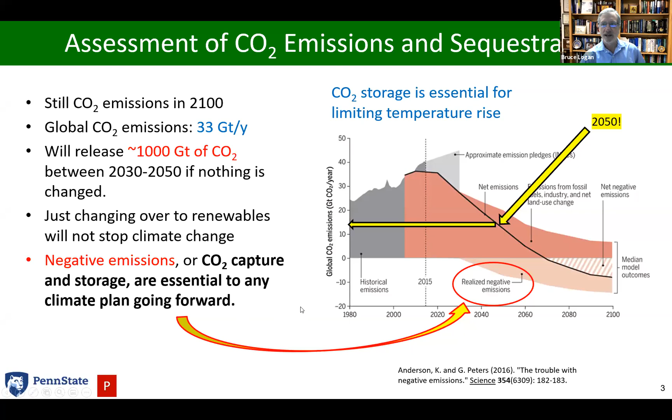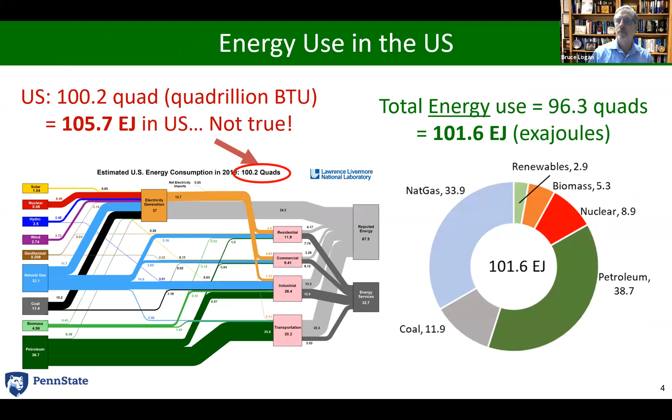Why is it none of the above? Well, if you actually look at what the US says we use, it's 100.2 quadrillion BTUs, which is 106 exajoules. But the fact is we actually only use about 96 quads, or about 100 exajoules. So why isn't the US telling the correct story?

If we zoom in on the renewable part of this primary energy, and look at the energy going into electricity, a coal power plant is about 32% efficient, primary energy into electricity. Natural gas is about 44% efficient. What the US says is that for renewable energy, we're going to use an efficiency of 37.5%, meaning primary energy is 1.04 quadrillion BTUs to produce 0.39 quads of electricity. But that's a made up number.

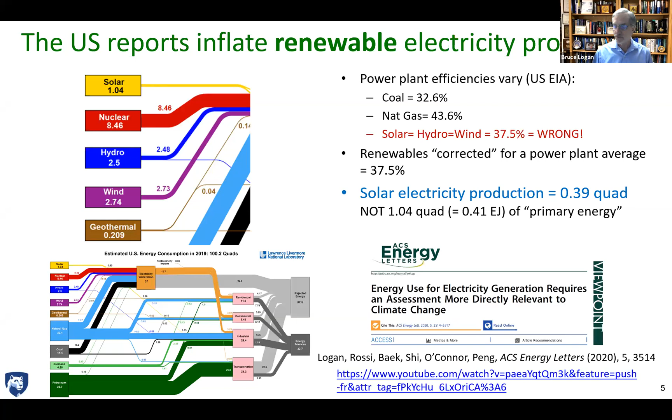Actually, solar panels are about 20% efficient. Hydroelectric plants are close to 90% efficient. These are made up numbers. So the implication is that when the US says our electricity infrastructure uses 39 exajoules of primary energy, that's wrong. We're actually using 35 exajoules of non-renewable electricity to produce our 14.2 exajoules of electricity.

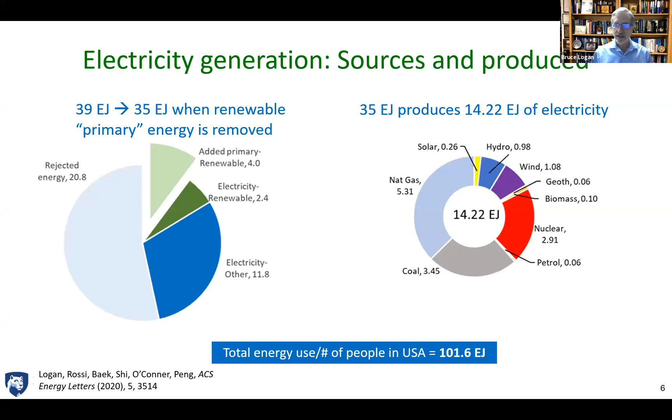Now, to put that against the backdrop, it's about 100 exajoules of total energy consumption. So exajoules, quadrillion BTUs, these are all different units, but your daily life is dominated by other sorts of units. How many miles per gallon does your car get? You probably know that.

But what about how many kilowatt hours your house uses? How many of you know about how many kilowatt hours your house uses in a day, or what the national average is for a house in the US in terms of its electricity use?

Good, we'll stop it there. It looks like we've got a consensus that it's about 60 kilowatt hours per day. Actually, the answer is 30 kilowatt hours per day.

So the problem with energy is it's all in different units. And like languages, when we want to talk to each other, we agree on a common language, or we translate it into something we know. So I either speak the same language or we have a translator. Same thing with energy units. We have to learn to take these disparate units, where calories with a capital C is different than calories with a lowercase c, and translate it into something we know, maybe kilowatt hours or BTUs.

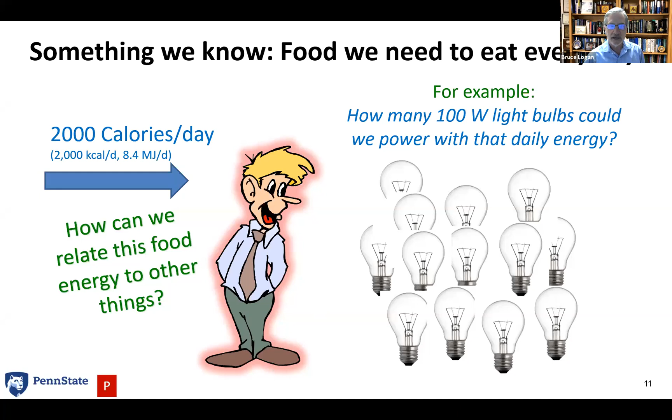Okay, that's a pretty good range. I think it's pretty typical here that most people guess about 5 to 10 light bulbs. And here we have about a third of the people said 10 100-watt light bulbs. And the answer is one light bulb. Actually, we only need 2,000 calories. You translate that into watts, and that's about 97 watts, or about 100 watts.

So that tells you that we sort of have this disconnect about how much energy we think is in the food we eat and how much energy we're using.

Now, the other side of the energy climate change nexus is when we eat those 2,000 calories, how much CO2 is being emitted into the environment from that food we ate? Just from the 2,000 calories, the beef, the hamburger, or whatever we ate, how much CO2 do you emit as a person? So in pounds per day, because you ate breakfast, lunch, and dinner, how much net CO2 do you emit into the environment?

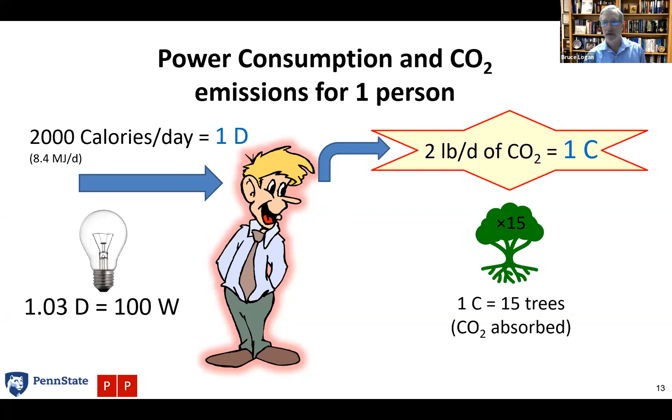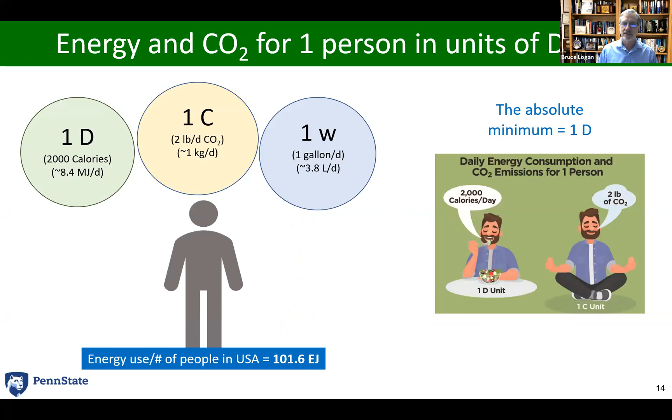So this is the perspective I'm taking: let's look at everything on the basis of how much water do I need every day? It's about 1 gallon or 4 liters. How much energy do I need? Well, 2,000 calories just to keep me going. And then 2 pounds a day of CO2 coming out.

When you look at things like the energy for your home, it's about 13 times that energy that runs you. A gallon of gasoline actually has 15 D, so a little bit more than even the energy it takes to run the average home. Food to your table, about 24 D.

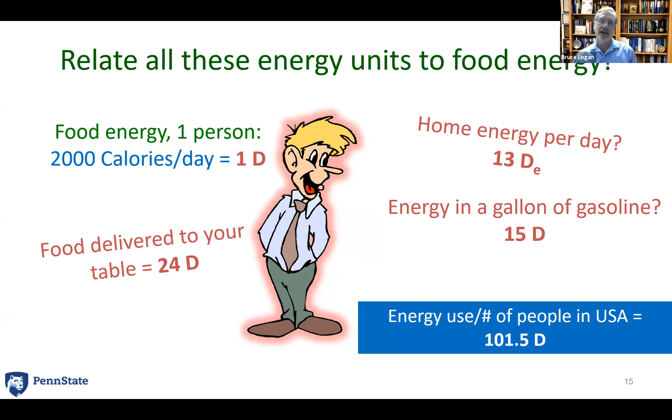Again, 100 D for the energy that everybody in the US uses. You take all the energy we use, that 100 exajoules, divide by the number of people, and you get about 101 D. There's a curious conversion here: we use about 100 quads, about 100 exajoules, rough numbers, but the exajoules for everybody in the US works out to be almost the exact same number as D.

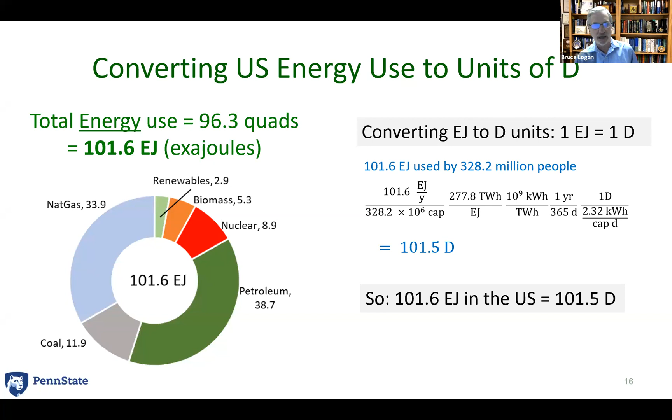So whenever you see D, if you want to think 'oh, that's exajoules for everybody in the US,' or put it into different units, that's how you do it. 1 D is also about 2.3 kilowatt hours. So whether you want to use D, or you prefer kilowatt hours or exajoules, that's what you can go for.

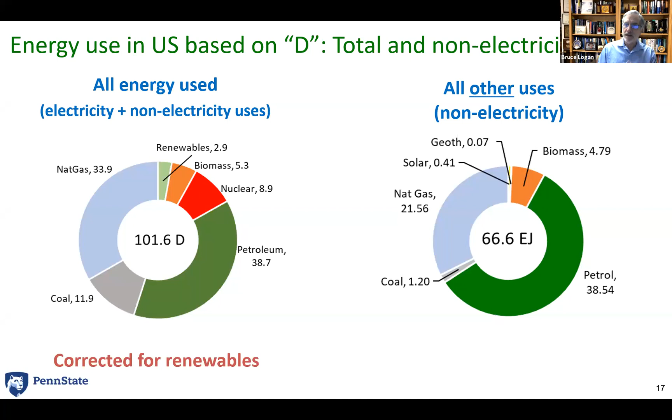We have the 100 D, or 100 exajoules, of all the energy we consume. About two-thirds of that is not related to the electricity infrastructure. It's related to other things, and most of that is petroleum products, oil and gas, and that sort of thing. But I'm not going to talk about that so much from the perspective of petrol.

I want to talk about trying to think about decarbonizing everything, going to a green electrical infrastructure. So if you look at what we have now, on the left this 35 exajoules or 35 D, and you look at the renewable energy part in terms of primary energy, where that renewable energy is just the electricity on the left, and then you convert that into electricity energy on the right, you can see that renewable part starts to get bigger, because we're just looking at electricity in both cases.

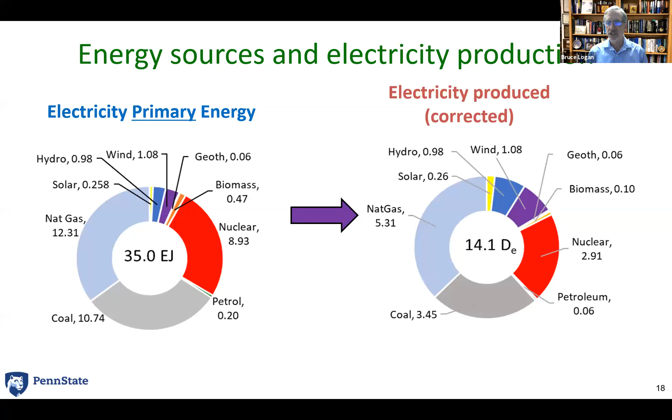In fact, as we transition from fossil fuels into electricity, we're going to use less and less, quote, primary energy, because it's going to be renewable and we're not going to be consuming that primary energy. So we can shrink and watch our energy use go down just because we're shifting to renewable energy.

So let's shift now to talking about our own lives, our house, our cars, decisions that we make in our life. For example, the electricity in your house is about 13 D, powered by the US electrical grid. That's about 5 C, just in terms of the fossil fuel footprint of that electricity. And if you have 2.51 people on average in a home, that's really about 5 D per person.

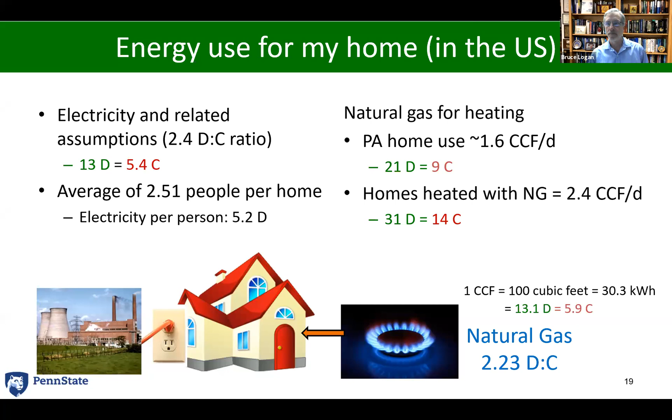Now the question is whether you include natural gas in that. A lot of houses in Pennsylvania have natural gas heating and electricity as well, and in Pennsylvania the average house uses about 20 D of natural gas to heat the home. So one of the things you think about here is, should I use natural gas to heat my home, or should I use electricity? And the answer is, it depends.

How much carbon do I emit from natural gas for heating a typical home? If you're using natural gas, it's about 8 or 9C, times 2 pounds per day of CO2. If you have a heat pump, you get down to about 5C for the most efficient heat pumps.

How can heat pumps be more efficient than natural gas if natural gas converts 95% of fuel into heat? The answer is that a heat pump moves heat, it doesn't heat up itself. It's like carrying 2,000 calories of groceries into the house - it didn't take you 2,000 calories to carry those groceries in. So the efficiencies of heat pumps are above 100% relative to how much heat they can move, or how much air conditioning they can provide, relative to the energy needed to run them.

So you can make a big decision in your life, when you have a home or need to retrofit a home or build a new home, to make sure you use a heat pump whenever possible. Now, if you have a heat pump, you don't need that natural gas.

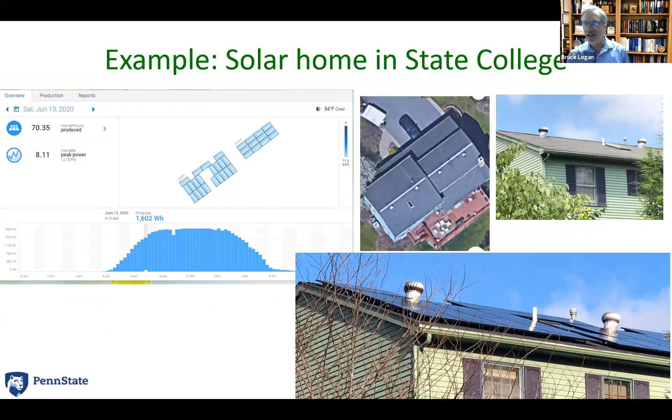This July was absolutely the hottest, sunniest month on record. So I had great solar energy production, but of course air conditioning was turned on, which kind of negated it. But the point is, they can predict it pretty well.

The other thing you have to know is how long does it take to pay back for solar energy. My contractor gave me some numbers, and I translated that into 15D. In 2020, my panels produced 17D, so I'm pretty much on target for what they say about what you should be able to do.

And if you look at different states and what electricity is selling for, and the federal discounts - you get tax credits for this - your solar panel should pay back in about 10 to 12 years, depending on where you are.

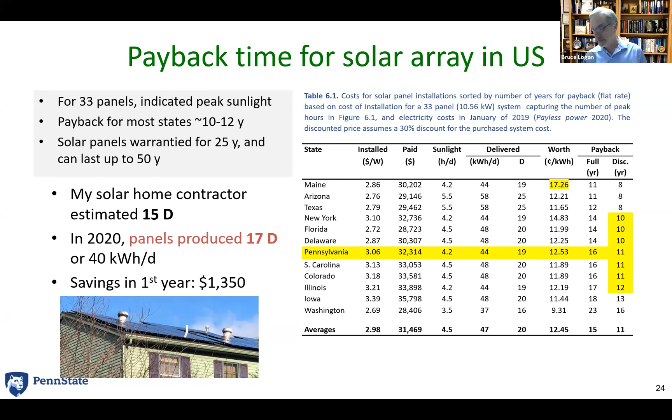Interestingly, Maine and Arizona have almost the same payback, because electricity is cheap in Arizona - it's really expensive in Maine. Maine doesn't have so much sunlight, Arizona's got a lot of sunlight. So the payback ends up being about 10 years in pretty much most places in the country. But you're probably using a lot more electricity in Arizona for cooling, so you should get them.

All right, what about cars? I got another question for you on this one.

The question is, what car emits more CO2 - a Toyota Prius hybrid that gets 52 miles per gallon, or a Tesla Model S, the energy efficient one, being powered using electricity from a coal-fired power plant?

Now you might want to think, well, this must be a trick question - of course the electric car will have less net CO2. Let's see here - about 2/3 of you said the electric car and 1/3 the Prius, and actually that's right. Let's take a look at why that is.

For those of you who may not be in the U.S., we use MPG here, of course, and it's liters per 100 kilometers elsewhere. The little quick conversion is 234 divided by MPG, or 234 divided by liters per 100 kilometer, to interconvert those units. The way we evaluate electric cars is with miles per gallon equivalent, or MPGe.

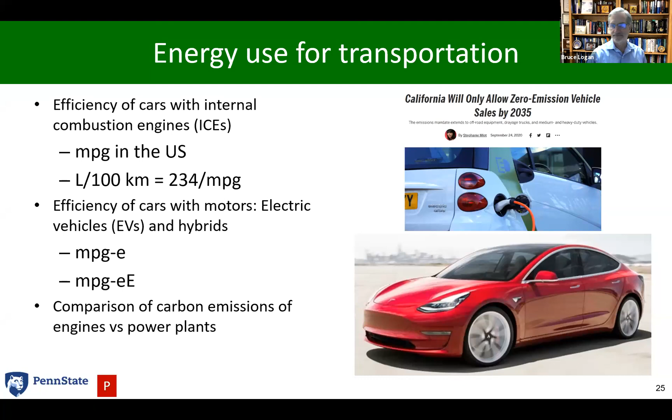That's how much energy, electricity energy, a vehicle uses that's equivalent to in a gallon of gas. So if you look at the miles per gallon of 3 cars: an average car sold here gets about 25 miles per gallon, a Prius gets about twice that, and a Tesla 3, in terms of the energy they use, even more.

Now converting the Tesla 3 back to primary energy - that's the energy that went into making the electricity that got to your house to power it. It's not a coal plant, it's the US grid on average. The Prius actually uses a little bit less primary energy to go the same 37 miles.

However, when you look at carbon emissions, because the primary energy for the Prius is gasoline, while the primary energy for the electricity is actually a range of things, some of which is carbon-free like nuclear and renewables, it actually emits less carbon. So if you run the Tesla on the US electricity grid, it has less carbon emissions.

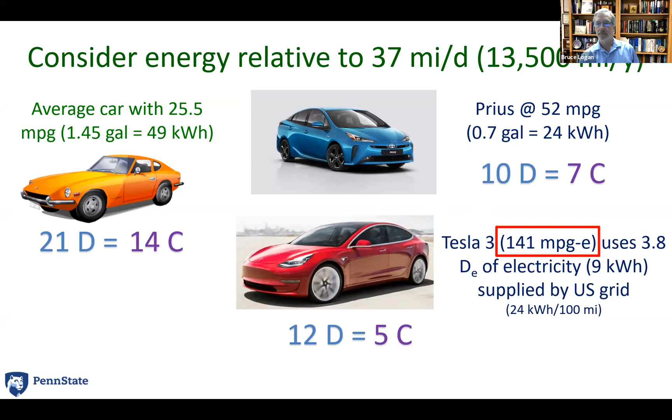I'll get back to this 141 in a second. There's that 141, but if you convert that to what I have here - this capital E is the primary energy - that Tesla is getting about 45 miles per gallon equivalent, which is why it's using more energy.

But if you look at the carbon emissions now for an average car, the Prius, and the Tesla - if you're on the US grid, it's about 5C, versus 7C for the gasoline Prius.

But because coal is produced very inefficiently - electricity efficiency is like 33% - and it has a lot more carbon emissions than gasoline, that Tesla, if it's running on a coal-fired power plant, is about 12C versus 5C on the US grid, or 7C for the Prius.

141, what is 141 miles per gallon equivalent? Again, that's the energy in 1 gallon of gasoline. I thought you might find it interesting that you, the human being, get about 300 miles per gallon of energy equivalent. That is, you could walk 300 miles on the same amount of energy in a gallon of gasoline.

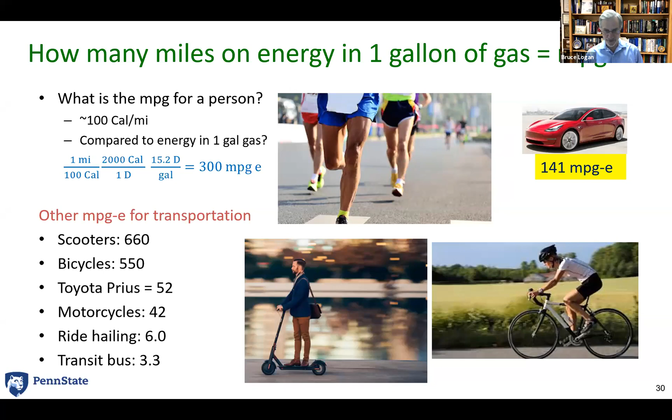If you bike, you can go about 600 miles. If you use these little electric scooters, actually, you can go almost as far on the same amount of energy. They're pretty efficient, but they're not safe at all, so don't use them - they're really, really a bad idea. And this guy, of course, I show you in the picture, doesn't have a helmet on.

Sometimes people ask me about hydrogen - I do a lot of work in hydrogen. So the question is, why not hydrogen for these vehicles? Well, the study that California is doing says that light duty vehicles, cars like you're seeing here, are not really anticipated to be fueled by hydrogen. It's a nice idea, and it's not that it's not energy efficient, but the real need for hydrogen is in heavy duty vehicles - trucks and larger vehicles.

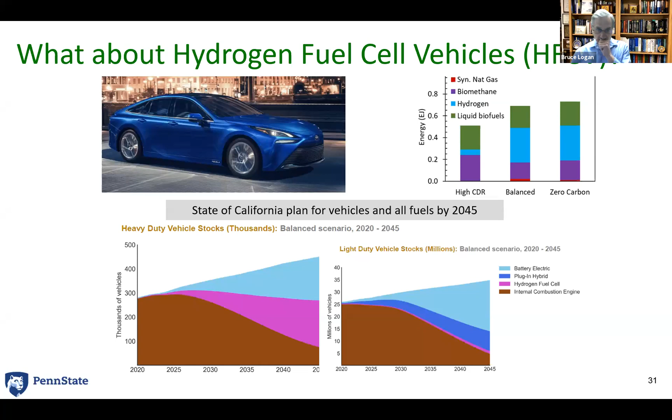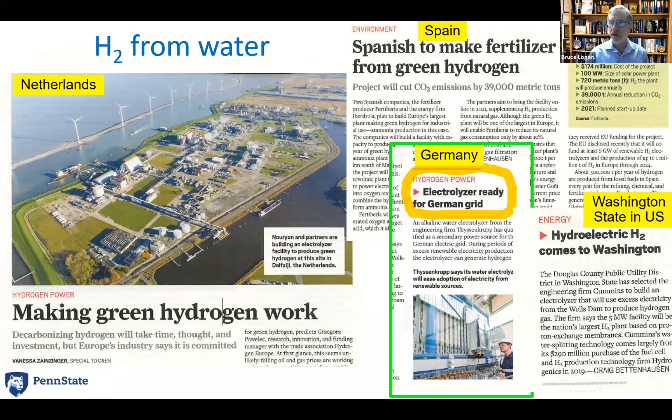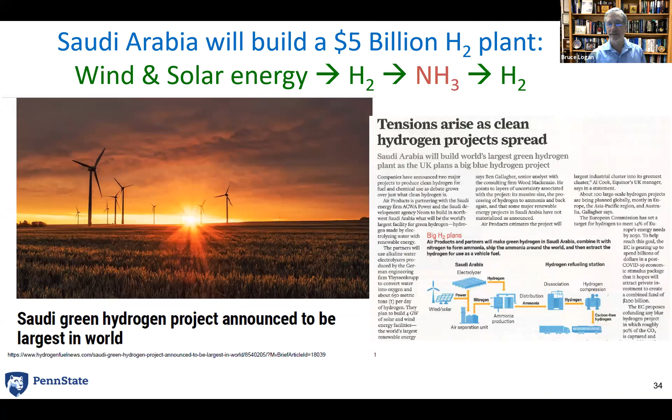And the biggest hydrogen project being planned in the world right now is a $5 billion plant under consideration for construction in Saudi Arabia. They would make hydrogen, turn that into ammonia, transport it, and then turn it back into hydrogen. Of course, maybe they'll just use the ammonia that they have.

So I've told you now what you can do with your house, I've told you what you can do with your car, and let's get back to that question of food then. How much primary energy - that's the energy in the fuels to get the fuel, the power of the harvesters, the energy in the electricity converted back to primary energy - how much energy does it take, in units of D, to put that on your table when you're going to eat 1 D of food?

This is also a bit of a quiz of how much you've been paying attention, because I told you this number earlier on, so that'll be interesting. But I'm throwing a lot of numbers around, so I don't really expect everybody to get this. By consensus, about 50% of people said 13D, but the answer was about 25D.

So the food system, you can read this, it's published widely, about 13 quadrillion BTUs, or exajoules. It's energy to produce the ammonia that goes into fertilizer. It's energy that goes into transportation and all these other things. It's about 13D, but the reason the answer is 25D is because it's primary energy.

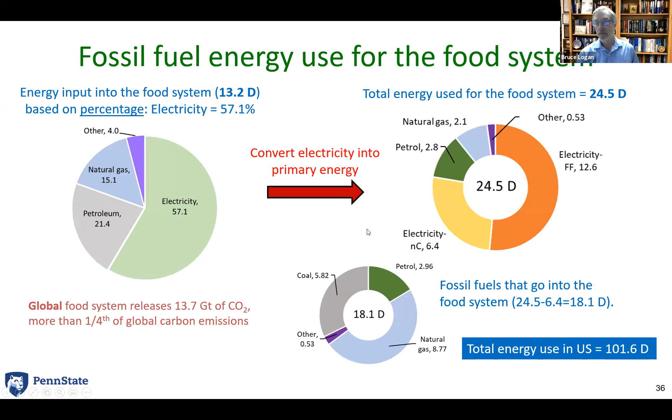So 25, a quarter of the primary energy being used in the US is for the food system, which is not something you can directly control like you can your house or your car. That results in about 11C of carbon emissions. So 1C that you breathe out due to eating the food is about 11C.

And because we're in America, we eat a lot of hamburgers. I thought I'd throw burgers up here, because a quarter pound burger is about 6C, 11C, 6C. And if you decide to go for some of these Impossible Burgers, Beyond Burgers, vegetarian burgers, that new wave of burgers, you can get that down to about half a C, which is pretty good. And also the water use drops way off as well. So I encourage you to try the Impossible Burger.

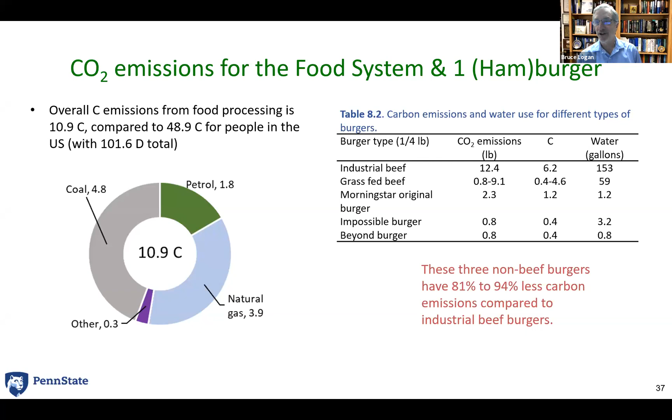They're really good. I mentioned ammonia and the amount of hydrogen that goes into making ammonia into fertilizer. About half the hydrogen made today goes into just making ammonia so that we can get modern agriculture. And that is about 1 to 2% of all global CO2 emissions just due to making hydrogen.

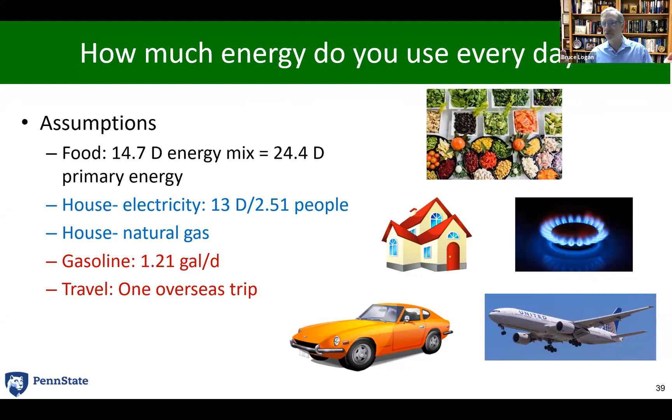So let's bring it back down to what you have control over and what you don't. I think a lot of people tuned in are thinking, okay, 100 exajoules, what can I do about that? Let's just think about these things I've mentioned: your food energy, your house, maybe some natural gas to heat the house, gasoline, and travel, one international trip or a couple domestic trips a year on an airplane. Where does that put you?

Well, that puts you at a total of about 68D, with about 57 of that D coming from fossil fuels. So these are the things that you control, right? You got to eat, okay? Everybody has to eat. Then you convert that back to primary energy.

You consume electricity for your home, natural gas, and vacation and gasoline. You can see that. Look how big that gasoline piece of the pie is. It's pretty big. That shows you how important that 1.2 gallons per day that we use on average in the US.

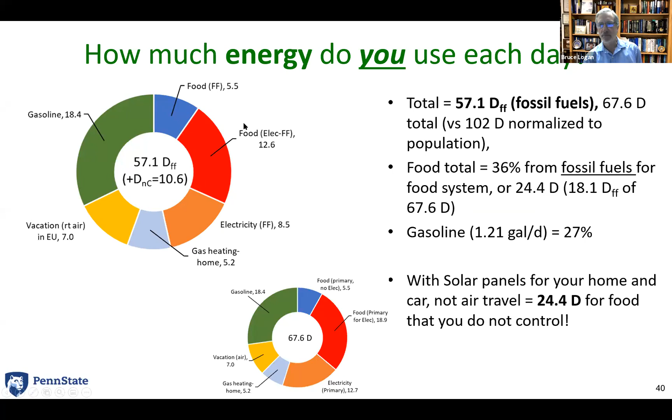And the food system here, this food from fossil fuels directly, and then the fossil fuels that we use to make the electricity, that's a big part of it too. It's about a third of that. So your activities and your food, about 30C.

Going back to trees, if you wanted to balance off that 30C of emissions, you'd need about 450 trees. And just to let you know, an acre typically has about 100 trees, maybe a couple hundred in a well-managed area. So unless you've got a lot of land, you're not going to make it, but we do have a lot of land in the US, so there is some hope there.

That 30C that I'm talking about from those activities can be compared to the 50C on average for the US. When you look at these two numbers, what I'd like you to think is, that 30C, I actually control a lot of that. I control it based on what I drive, how my house runs, and what I eat. So let's say that you took that 30C and you put solar panels on your house, and now you're fully solar, powers your car and your home and your heating and everything else.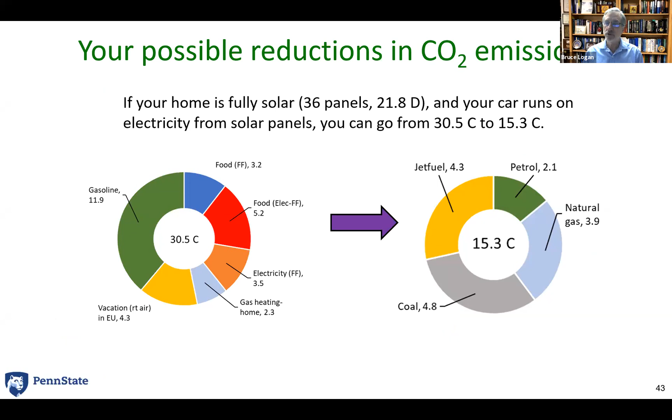Now you're down to about 15 C, because that's what's in the food infrastructure, and you can't really control that. Where do we want to get to? This is getting back to this question of global CO2 emissions. Well, we want to get to, optimally, we don't want any C to come out from fossil fuels.

There's a society called the 2000 Watt Society. I'll call them the 20D Society, who suggests maybe 15D of renewable and 5D of fossil fuels. If we're looking at 5D of fossil fuels, that's about 3C. So we're looking as a goal maybe to try and live a lifestyle that's 5D and 3C.

Wow, that is a pretty tall order because we're at 100D and 50C in the US. The scenario I went through is like 60 or 70D versus 30C. In Switzerland, where the society originated, it was about 50D. I don't know what their C was. The world averages, all the people in the world, all the energy used in the world, 25D, 12C.

Okay, so we're on a path of climate change, which is really bad just based on the world having 12C.

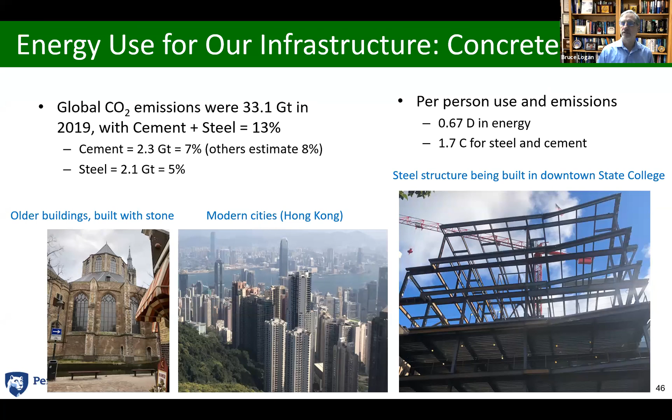Okay, I'll just say something really quickly too. We're in a civil engineering department here. The main three things that probably we need to think about are transportation, that's part of civil engineering, and our infrastructure in terms of concrete and steel. Concrete and steel are responsible for about 13% of global CO2 emissions. And so we can certainly solve our personal lives by the buildings we choose to live in, but modern cities have moved beyond stone and a little bit of cement into concrete and steel. So that's something we need to think about.

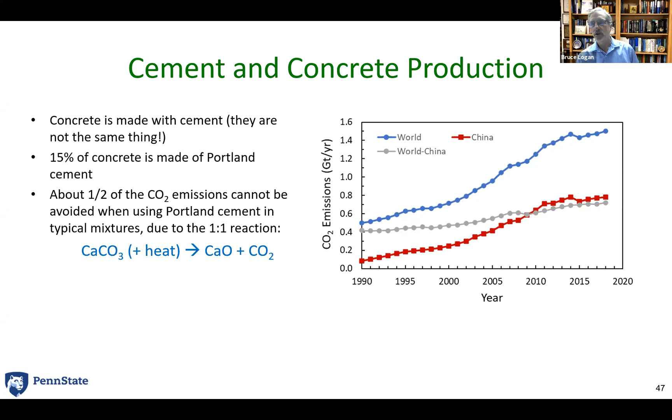But the problem we all face is that when you make cement and you take calcium carbonate, you release one CO2, and that's the stoichiometric relationship you cannot change. And so if you're going to use Portland cement, if you're going to use cement to make concrete, you're going to have these CO2 emissions. And so for the civil engineers, and I know there are people in the department that work on this, like Shad, we need to look at these alternatives - we can't impact CO2 emissions significantly unless we find alternatives for Portland cement.

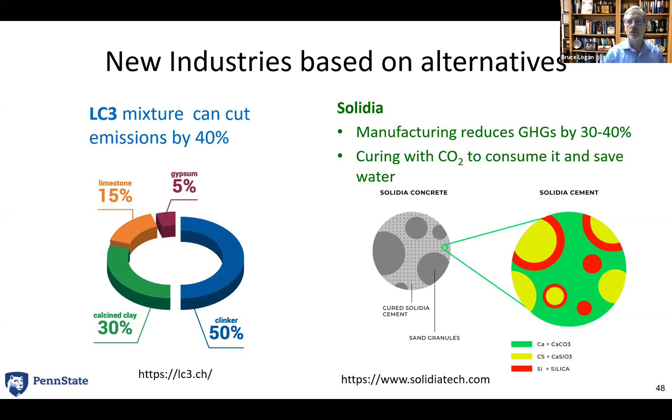That's the way we do it. And there are companies working on that. And as civil engineers, we need to embrace that and find ways to use that.

So I'll finish up now on the last topic, which I've been working on: as we go through this concept of reducing our energy, we're not going to be able to reduce it all. We need to think about climate change and carbon capture and sequestration. It can be tied in with energy, as I'll argue, but we need to recognize it has to be a part of our energy infrastructure, intertwined with it.

Trees are great. As I said, 15 trees will get you 1 C. And if you've got 20 C, you do the math. You can shade your house, and that's good for reducing air conditioning.

One of the concerns with trying to solve carbon capture through natural solutions like trees is that if there are wildfires or pests, you're going to lose that carbon right back up into the atmosphere, which has certainly been a problem in Australia and California this past year.

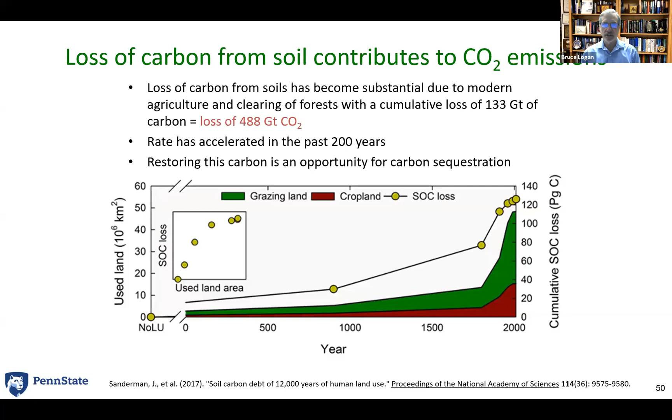Not just above ground, but also below ground, there's a lot of carbon in soils, and about 500 gigatons of CO2 equivalent has been released from soil due to agricultural practices. We're talking about 1,000 gigatons that we need to avoid and get out of the atmosphere, and 500 came because of the loss of soil carbon. So when you put a tree in, you're not just getting the carbon you see above the ground, you're also getting carbon capture into the soil.

So climate solutions where you capture carbon into trees and soils are great, but we still need energy. A recent study by Tom Richard and Erica Smithwick here at Penn State and others said, if we have this land we're currently using and we were to grow, say, miscanthus, which we could make into biofuels, we could gain a lot of carbon sequestration into the soil because these plants have an immense root system. We could use that above-ground carbon to make biofuels, and if we link it to carbon sequestration by injecting it into the ground, we get another benefit. This is a great paper showing that by thinking about dual use—getting both liquid biofuels and carbon capture—that's a win-win situation.

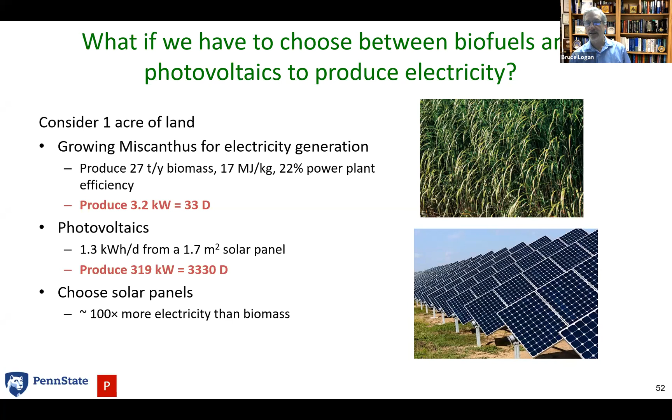Another thing you might think is, let's take that miscanthus and make electricity out of it as a source of energy. We'll grow the biofuel, convert it in a power plant into electricity, and use that. But let's compare using an acre to grow miscanthus, the best possible fuel you could have, versus putting solar panels on that acre. You'd be looking at about 33 D of energy using the biofuel as electricity, versus about 100 times that, 3,300 D, if you put solar panels on that one acre. That's why solar farms are really important. Even though we can put some solar panels on our house, we need to turn a lot of acreage into solar farms too. That's how we're going to make the electricity we need, and make it carbon neutral.

Another consideration: aren't I better off capturing this carbon into trees instead? Of course, if I do that, I can't put up solar panels. Well, an acre of trees is going to draw down about 6 C of carbon, but if you put an acre of solar panels out there, you're avoiding about 2,000 C by making that electricity the way we do on the US grid. So in terms of drawdown solutions, where we can put trees, let's put trees, but if we can put solar panels in places and generate electricity like that, it's going to avoid a lot more carbon than it's going to capture.

I think we're all going to see in the coming months with the new administration a real emphasis on carbon capture. Right now it's too expensive. This is just the capture part, 200 to 700 dollars per ton.

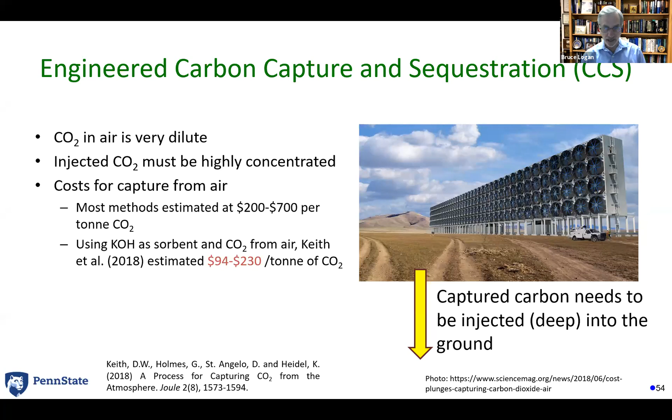There's a group led by David Keith, I think is his name, building these huge fans to move air through and capture CO2, and then you still got to inject it. The cost there is lower, getting into around $100 per ton, which is supposed to be a good range.

I mentioned one though that's an integrated solution in Belgium, in this town Mol, Belgium. They have geothermal energy, and because of that they have a lot of fans and blowers. So they think, if we could integrate carbon capture into these blowers which are already running, we could probably do this for about $70 a ton of CO2. So that's another good example of thinking about things you have to keep running for geothermal energy, a renewable source, while also dealing with carbon capture.

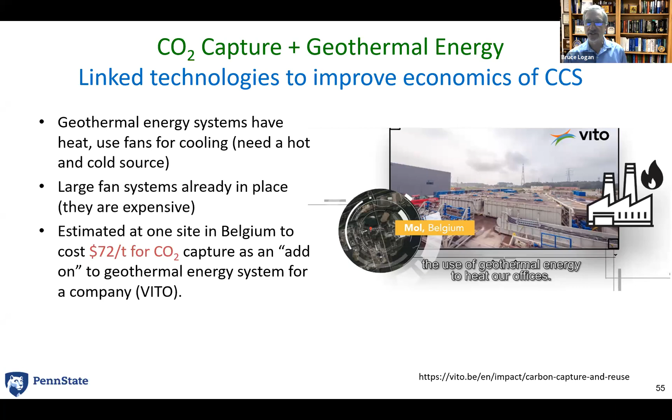So to come back around, we're looking at about 30 years. We need about 1,000 gigatons, over 30 years at about 30 to 40 gigatons per year. We've got to pull that down. How are we going to get from 15C globally to 3C based on the 2,000 watt society?

Project Drawdown has a lot of solutions for that, but Project Drawdown requires Project Us, all of us, to think about what we can do for that drawdown. There's a lot of control we have in terms of how we buy or purchase green electricity, or make it on our homes, or put in solar farms, as well as what we eat.

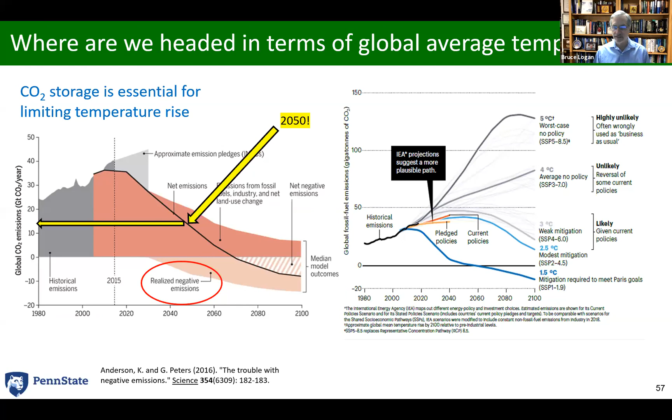So I started out with this graph. The one on the left is the one I showed you at the beginning. The one on the right emphasizes that if we don't get that black line, if things keep going up, we're at 4 degrees C or 5 degrees C. Those are also global averages, and land temperatures tend to be almost up to twice as hot as global averages. So you're looking at 5 degrees C, 10 degrees C, like 15 to 18 degrees Fahrenheit. I don't think that's the future we want.

I hope that at least this talk has convinced you that you actually have a lot of control over this. You can choose what you drive. You can choose to use heat pumps in your house, or electric baseboard heating, or many other decisions in your life. Take control of that and try to do the best you can, and communicate that to others—that we do have these things we can make positive decisions about.

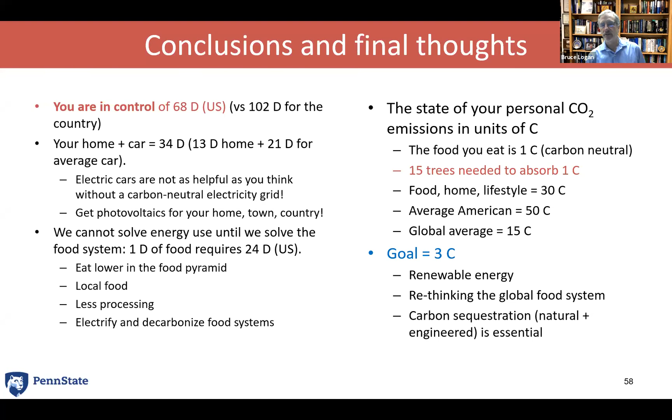As a country, we need to work on our food system. We need to rethink how we transport, grow, make ammonia, and do all these things that will definitely have a huge impact on our overall carbon emissions and energy use. Natural carbon solutions are going to be there—trees do work, there's no question about it. But ultimately, to get down to 3C, we're going to need both carbon capture and sequestration.

So I will stop there, and I'll leave the slide up for just a minute, and turn it back to Lili for questions and comments if we have time. Thank you. Thank you, Bruce.

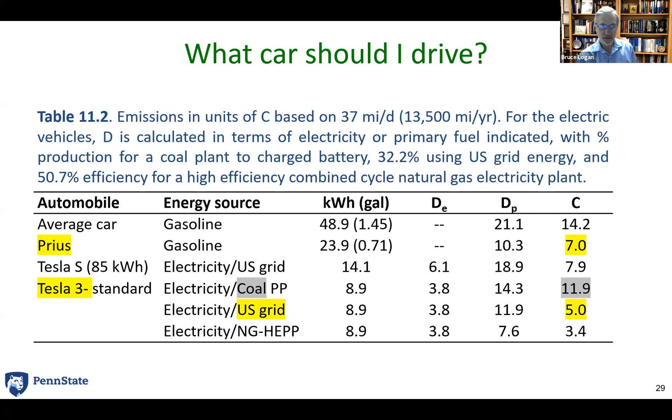The columns there - sorry, I got to move my thing around. If you look at... oh, that's the car, sorry.

So the baseboard heating is just turning electricity into heat, but you had to use a fuel to make that electricity. Then you lose about 7% of that electricity getting it to your home. And then you turn on that heater. So it's really the most expensive way, and it's the most carbon impactful way to heat your home.

In terms of somebody building a house, it's very cheap to put in electric baseboard heating, getting back to the point about capital cost. Electric baseboard heaters are really cheap, but you're going to pay a lot every time you turn them on. So from a carbon point of view, they're terrible.

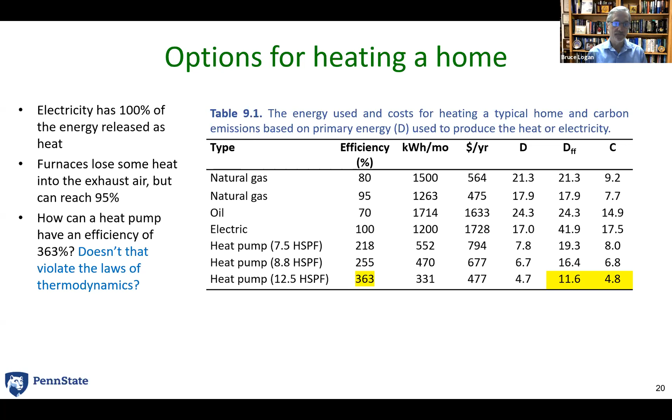Great presentation, Bruce. I have a question with respect to the food aspect of the analysis. My background is anaerobic co-digestion, so I look at food waste and wastewater sludge and how to improve energy recovery there. I was curious whether in your analysis you took into account the food waste within the food production chain and how that contributes to the CO2, and if we put that food waste to good use through co-digestion, how do you think that would impact the analysis?

Yeah, it's a really good point. I don't have time to cover it all, but food waste—I'm trying to remember the number—it's like a third of the food is wasted in the US. So just take that 24 that goes into the food system, you can change it to 16 essentially by not wasting food. And if you took the food that was wasted and put it into anaerobic digestion, you could get back a certain amount that could go into the electricity grid or be used as a fuel as well.